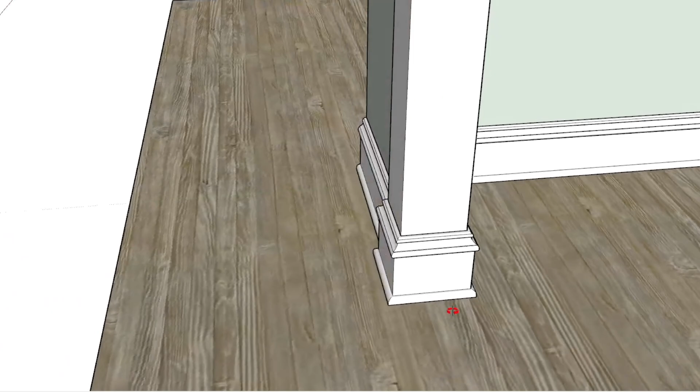Here's just a quick SketchUp model of what that was going to look like, and here's a photograph of the actually finished product. You can see they're very close together. So I'm just going to walk you through it.

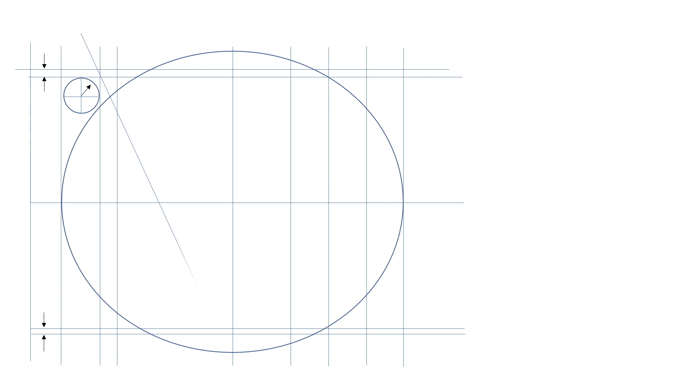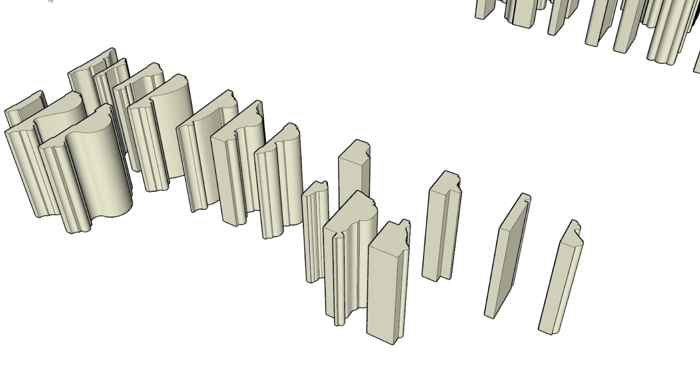The whole thing is just a few minutes long, showing how I arrived at this in SketchUp. I have a bunch of SketchUp models of millwork that I've painstakingly extruded—crown molding types, applied moldings, base moldings, trim moldings, casing moldings. I've got a ton of them as models, so I can take the profile off any of these, or a combination of them, to make a piece of millwork.

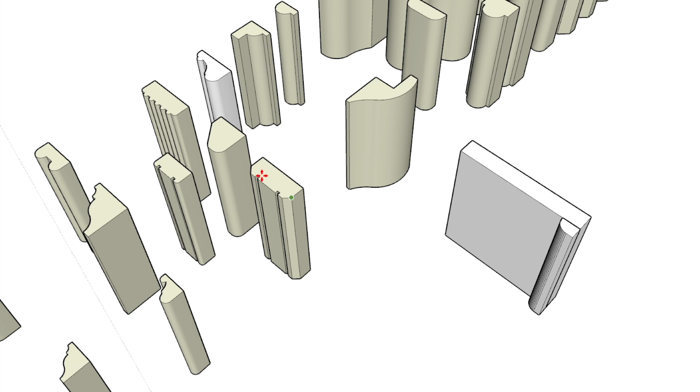Here are the three pieces that I've colored white. This is just a 1x6, which will be the main part of the base. Here's a little base shoe, and here's what's sometimes called a base cap, sometimes called something else—but this is how I built that base.

Once you have these shapes down and you've made your choices and extruded them to get a feel for what they look like, here I'm copying those groups, and then I'm going to explode them in order to make a unified single shape that I'll use with the Follow Me tool in SketchUp to follow the contour of the room.

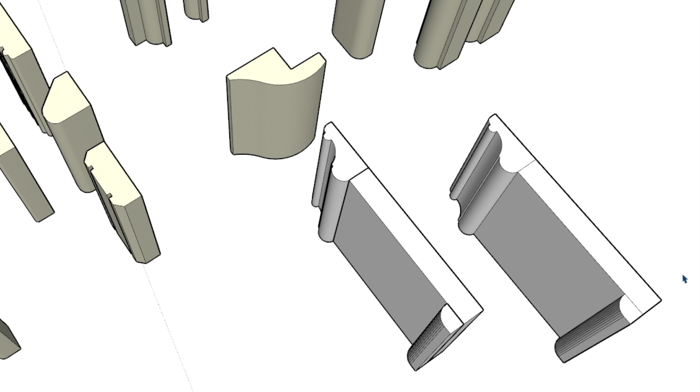So I'm just erasing the seams between these pieces, because all I really want is that profile. I'm going to take a copy of that profile, and that's what I'll use with the Follow Me tool to bring it around the room. So there's the profile that I'm after.

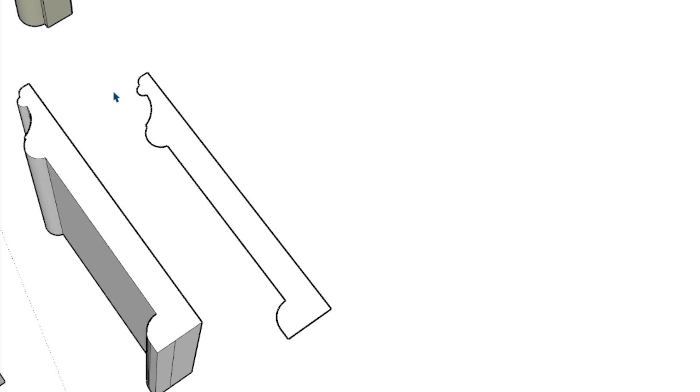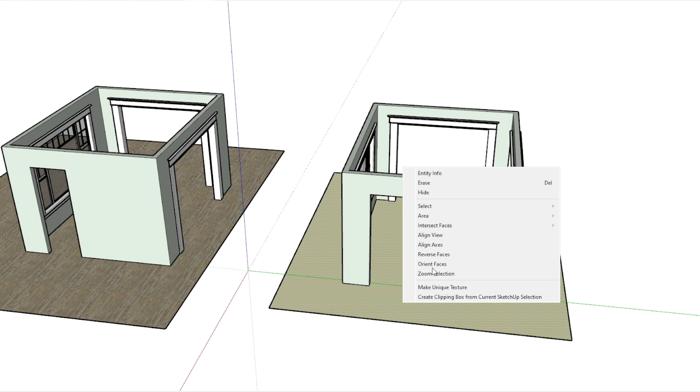Next, once I've designed the room—here's the room with no base molding—I simply take a copy of that whole room, place it over a flat plane like this, select the plane, and then choose the Intersect Faces tool. You'll see that once you've done that, it removes the room and leaves an impression, or a template.

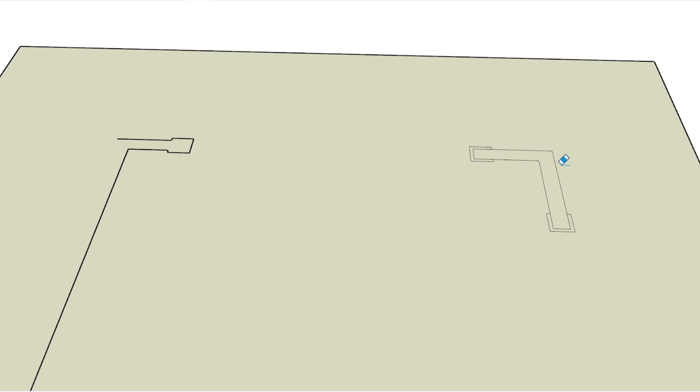This is the line that you want your base molding to follow. So I'm not having that base on the exterior of the room, and I'm not having that base go through that door opening. But I am having that base follow these columns.

So I'm erasing these lines so that I'll have the shape I want the base molding to follow. You'll see in just a minute, I'm going to demonstrate that Follow Me tool using this, so to speak, template.

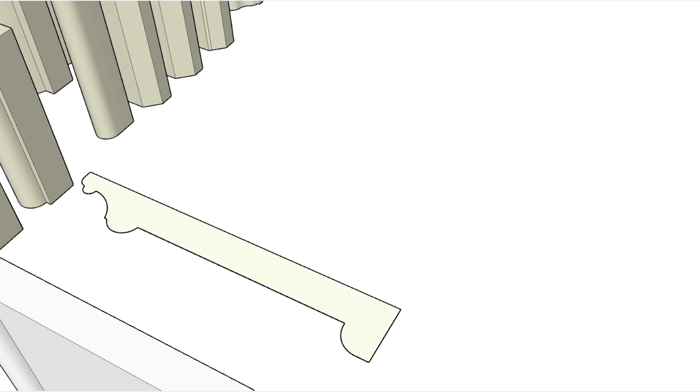So I'm going to go get that profile—here's the profile. I'll take a copy of this and bring it over to that template that I've created in that flat plane.

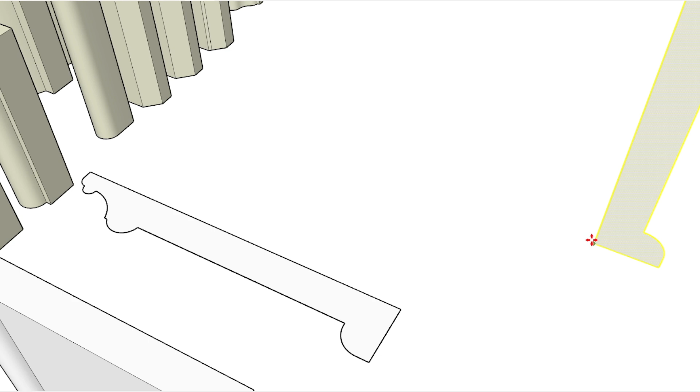First, I'll stand this profile up, then rotate it 90 degrees to get it in the plane I want it to be in when I bring it over to that other model. Then I'll go ahead and take this profile and drag it over there onto my template. And here's one corner of the room where this is going to be used.

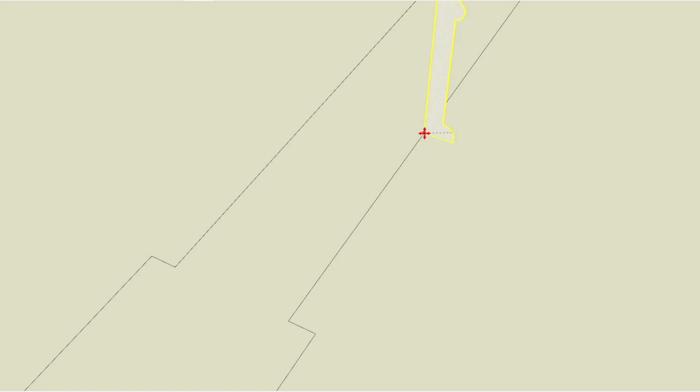I will also take a copy of this and put it on. I've got to get it right on the line, because the Follow Me tool will follow this line. I'll take another copy of this, take it over to this part of the room, set it on that line.

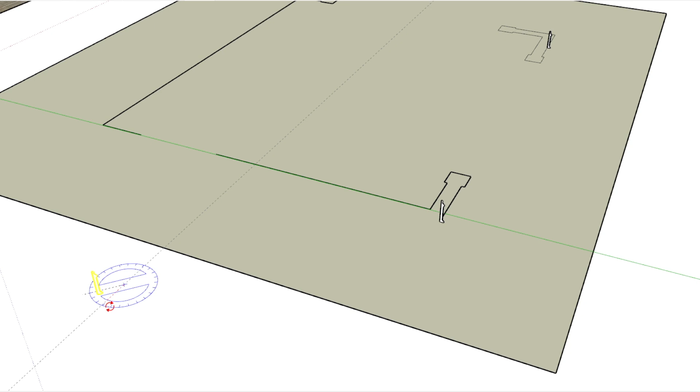I'll take a third copy of this, and I'll rotate it 90 degrees and put it on this final template so that the Follow Me tool will create these 3 sections of the room exactly. So there it is in place.

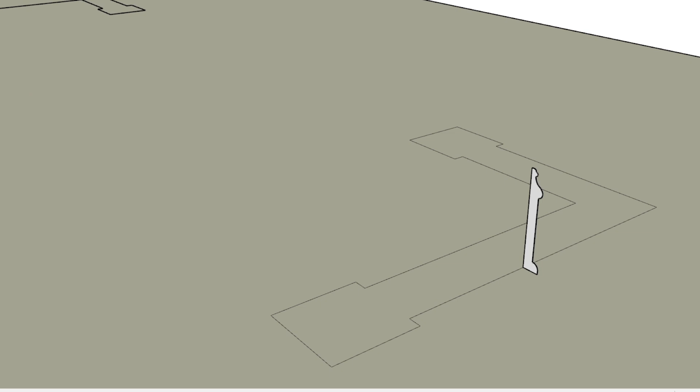Now all you do to use the Follow Me tool is to select the path that you want that profile to follow. And here I started by just selecting these lines using the selection tool. I'd forgotten that if you just grab the whole shape, you can select just the bounding edges. And so you'll see here, I'll reselect this in a moment. Just select the area, select the bounding edges, hit the Follow Me tool, and here's the fun part.

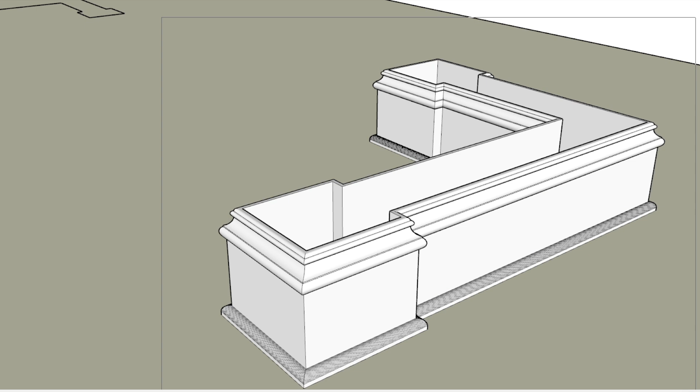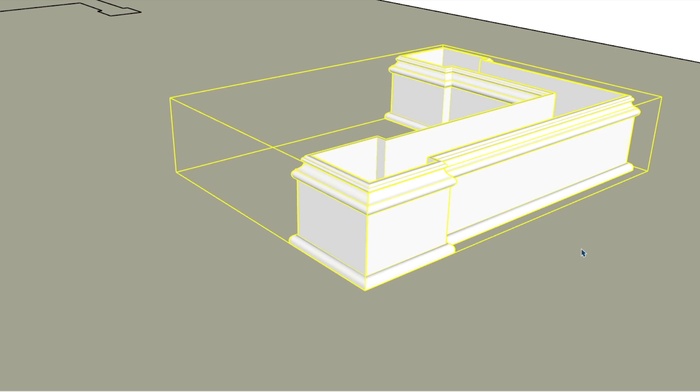Once you hit this Follow Me tool, it's built that entire section of your molding. Take another shot of that, soften the edges so that it takes care of all those lines, all that hidden geometry so that the curves look smooth. Make a group out of that section of base molding, and you're going to see I'm going to drag this later over to the model to complete the model with the base molding in place. So that's that first group.

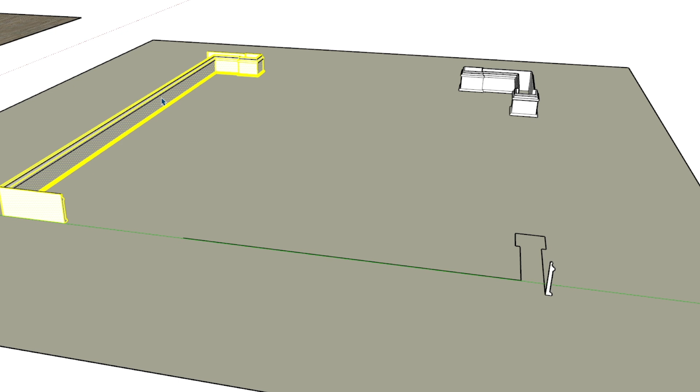The next one here, I'm going to select that line, this line, and this line. Again, apply the Follow Me tool to that section of the template. There's all of that base molding done. Again, select the whole section of base molding, soften the edges, save it as a group, and that's going to be dragged over to the finished model.

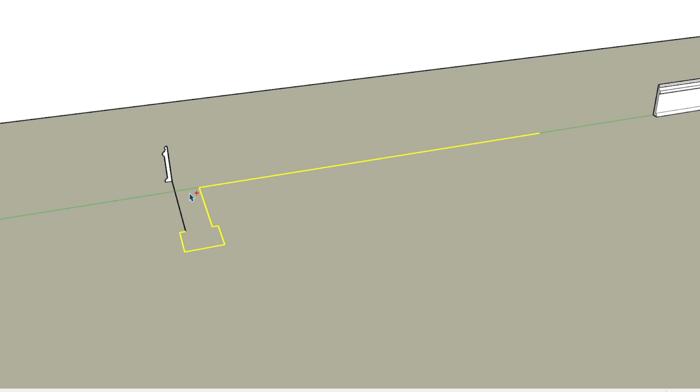And then finally this third section, again select the lines by using the selection tool, grabbing all those lines, highlighting them, apply the Follow Me tool, and here we go again. There's that section. Again, select the whole section, soften the edges to get rid of the hidden geometry to make curves smooth. Make a group out of it, and this will also be carried over to the drawing.

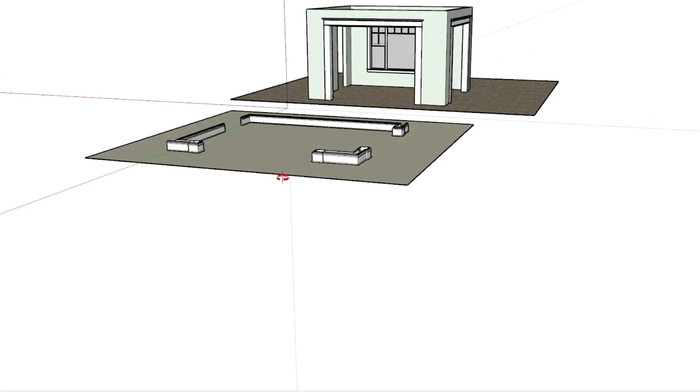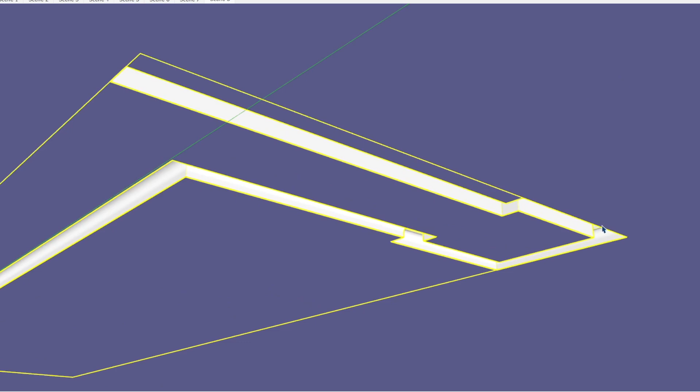Now, I seem to find that the easiest way to drag these over is to do it from the bottom, because then you kind of know where you are on the map or on the model of the room. So I just select that section of base molding by its corner, place it on the same corner on the finished model, select this section of base molding by one of the corners, and then drag it over to the finished model.

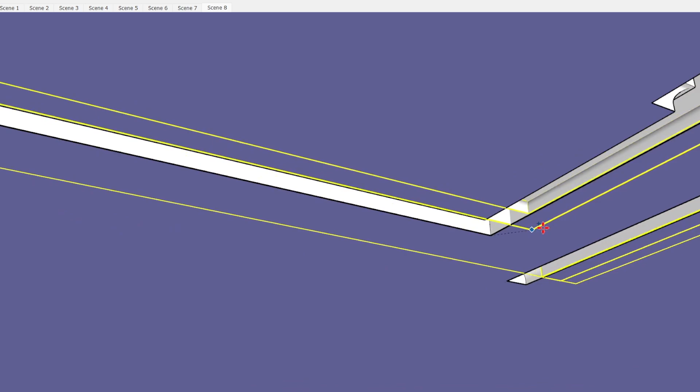And then finally the third section of base molding, grab it from underneath as well in one of the corners, drag it over to the finished model, and you'll see that we now have the room completed with base molding. Perfect fit,

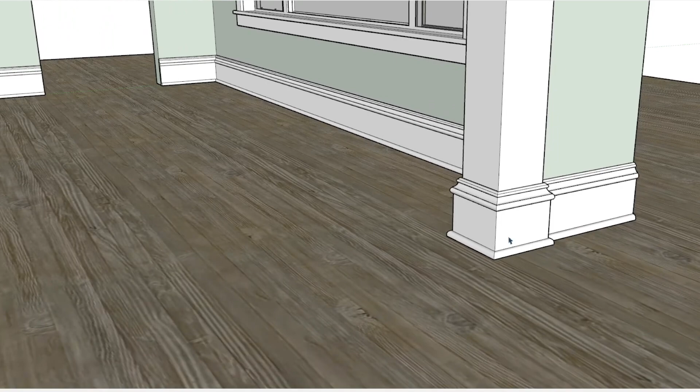true to life, exactly the molding profiles that are available from the Millwork store. Again, a 3-piece base molding using a 1x6, a little base shoe, and a base cap. And you get a model that is very, very accurately true to life as to how your finished product is going to look. So here's the model.